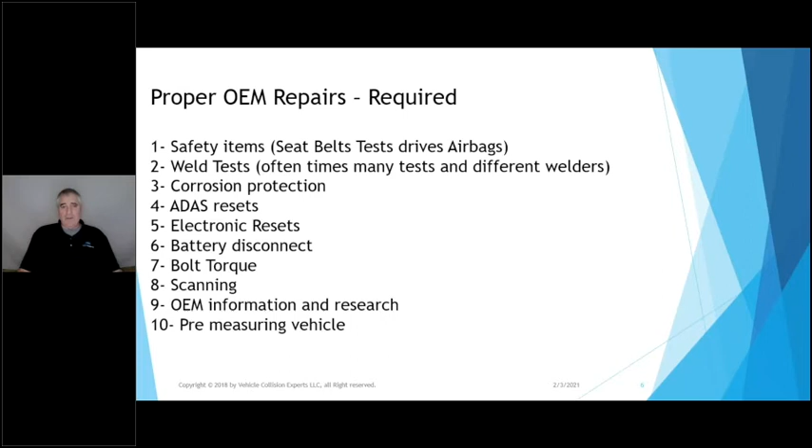So at VECO Experts, we just have a 10-step repair process. It's actually very simple. If you bring the vehicle in and you do proper scanning and diagnostics, and then you pull the procedures at the time of the estimate.

Back to my example of the aiming headlights. If you put down aim headlights at the time you write the estimate, you'd pull that information and find it has a whole bunch of other things you have to do, which you'd put on your estimate and give to the technician, who would then do that.

Now, you don't have to charge for it. That's up to you, that's a business decision. And if you want to do stuff for free, okay, but you can't not do it. I know it's a double negative, sorry about that.

Number 3, we give the procedures to the technician. You'd be amazed how many times we go into shops and find that technicians don't actually have the information that was pulled in the front office. And more importantly, the technician's got to follow them. I'll talk more about that in a minute.

Proper welds and attachment, whether it's rivet or bonding. If you actually put the car back together the way it was built - give an example, a Honda Civic - if you put a rear floor panel in the way it was built, you have not repaired the car correctly. It's different to repair than it was to actually put on.

Proper corrosion protection, proper use of the quality control sheet, proper refinish, proper use of the intake SOP, and proper vehicle protection. Now if you did all 10 of those things: scan it, pull procedures when you write the estimate, give them to the technician who follows it, do proper welds and attachment, proper corrosion protection, proper QC, proper refinish, proper intake, and vehicle protection.

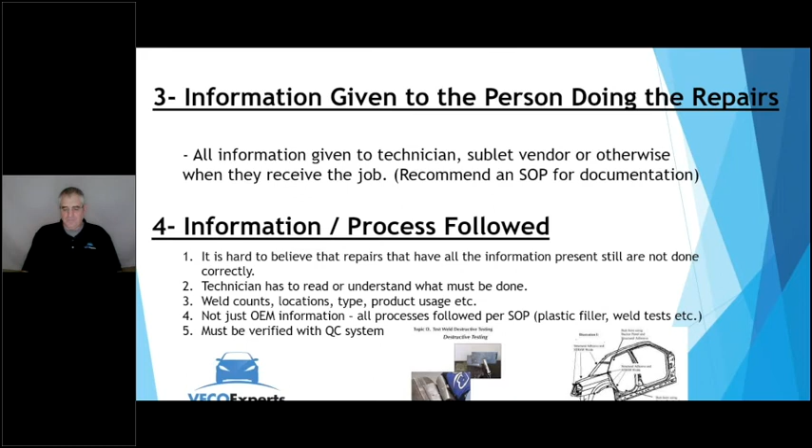So we're talking about not just where to section it, but weld counts, product usage, and then we got to verify all this. Okay, proper corrosion protection.

First of all, weld through primer or not, depending on the OEM. If you got a Chrysler that comes in, no weld through primer. If you got a General Motors, you're going to need weld through primer. Honda, no weld through primer if you're going to mag weld, but if you're going to squeeze type, you would. So it depends, and every car's a little bit different. Back to following the OEM.

If you got copper weld through primer, we call it contraband. Get it out of your shop. Get zinc weld through primer. You got it - there's no OEM that says copper weld through primer is okay to use.

Again, send me the hate mail, I'm totally happy to completely support this. I'm also one of the hosts of Collision Hub Repair University Live. We did a whole show on this, an hour and a half on copper weld through primer versus zinc primer. So I can send that to you.

No self-etching primer. If you got self-etching primer in the body department, you're fixing cars wrong. And when I say that, a lot of times people will shoot on some self-etching primer and then they'll put seam seal over the top of it.

Again, we did an hour and a half show on exactly that. Many shops are doing that. Got to put a two-part 2K product under there that's direct to metal under the seam sealer.

Now you might say, wait a minute, we do direct to metal seam sealer. I'll show you some pictures here in a minute on why you would never want to do that. So use epoxy where appropriate. If you aren't using epoxy under urethane glass, under body filler for some of the OEMs like Toyota, or under seam sealer, you're fixing cars wrong.

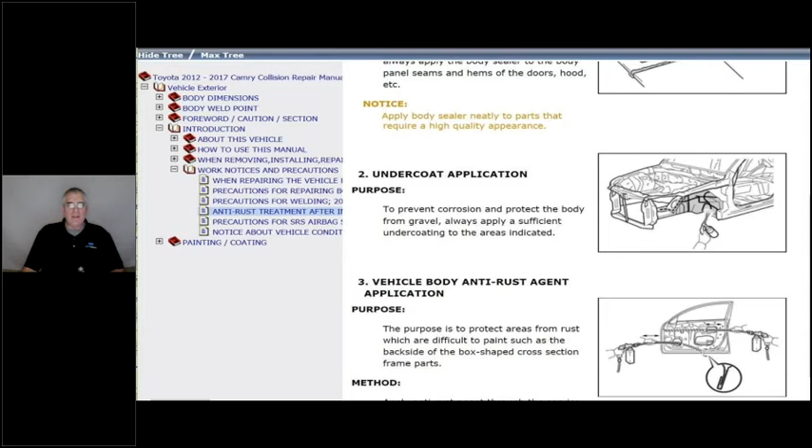Shop's in trouble. So the OEM actually does give you information on where to put cavity wax and all the different things, where to seam seal, how to do it, etc., where to put it inside doors and all that, on brand new parts.

Now, how about the copper weld through primer conversation? So a lot of manufacturers are going to give you how to actually do things. This is Toyota, it's a CRIB, a Collision Repair Information Bulletin, and basically they're saying you have to use weld through primer, and they're saying do not use copper weld through primer.

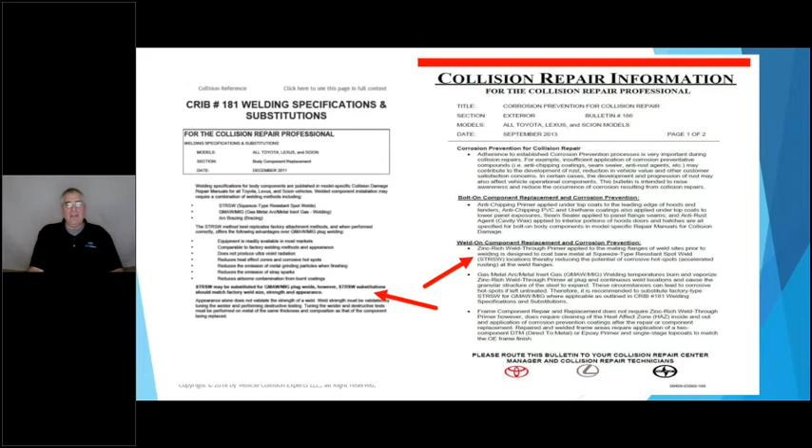Well, people didn't like to hear that, so they actually did an article on it in their Collision Pro saying don't do this. Again, at Collision Hub, we did an hour show on this, we showed you why. So now in my post-repair inspection class that I did, I don't know Melissa, it was probably what, last September?

It's February now, so 4 or 5 months ago, I talked about this. So this picture right here cost the shop about $14,000, I'll tell you why. I looked at this picture, and it looks like it's either rust, maybe somebody replaced the core support. Either it's rust or it's copper weld through primer, and there's no cavity wax. So what do I know? Number one, if it's rust, you can't stop the rust. Number two, if it's copper weld through primer, it's a Toyota Tacoma, and Toyota says don't use copper weld through primer.

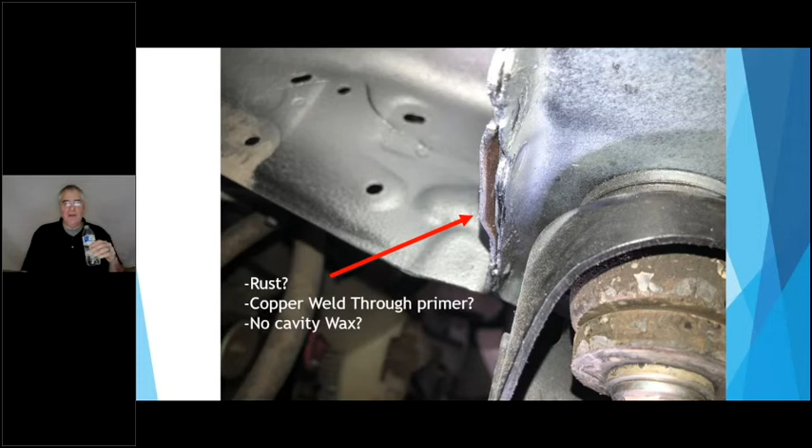And on top of that, they didn't use cavity wax, so it's rusting in between the seams. Regardless of that, this became a complete re-repair, costing about $14,000, because after it was taken apart, that's what the car looks like.

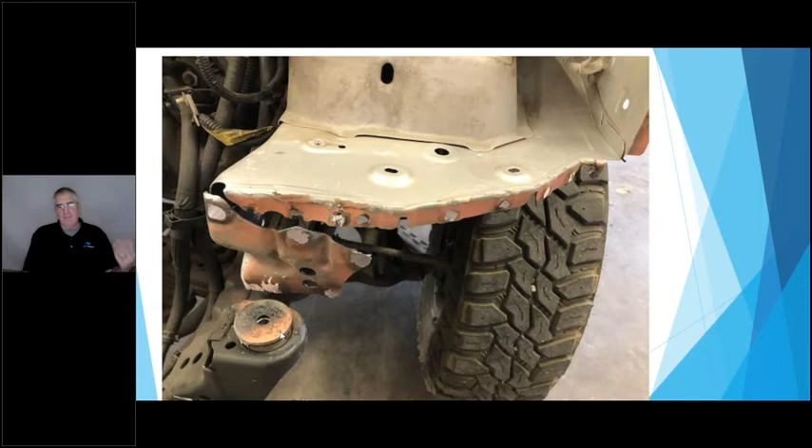Also, up along the edge, it looks pretty good, except when you start to really look at it and pull it down, it's actually rusting underneath. Now, it's not rusting bad under the seam sealer, just on the edge, but eventually it will rust. This became a complete re-repair.

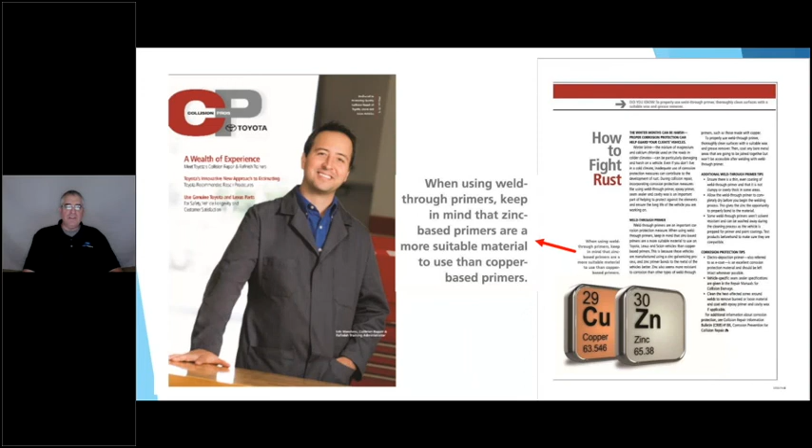Now remember I said a minute ago, you have to seam seal all welded seams, whether it was seam sealed or not, which was in this slide, right? Seam seal all welded seams, whether it's seam sealed from the factory or not.

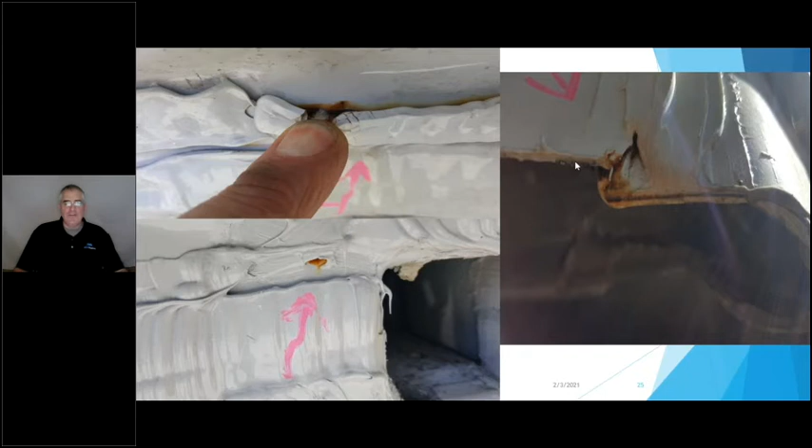I don't care if you use weld-through primer or not. Again, we did another show on that, and I-CAR had that out for years. Now, on this one here, no seam sealer. If water gets in between there, it's going to rust.

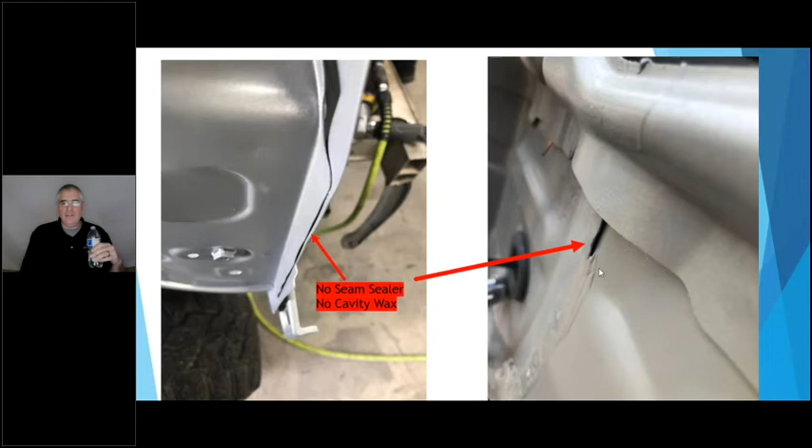It's a complete re-repair. Now this one's kind of crazy, where they actually seam sealed it almost, but then the flange wasn't completely straight, so they just didn't seam seal it.

And then this is kind of interesting. So, a lot of people say Hyundai and Kia don't have repair information. They actually do. Kia is actually much better than Hyundai, even though they're the same company. It's kind of weird. But this is from Kia.

It's a Kia Forte, and what they're saying is that they have wax injection holes in their hood. I believe there's 9 of them. So you have to put the wax in there, put 2 coats through 9 different holes under the hood, and also in the bottom of the door panel.

So when you replace the hood, what do you do? You've got to seam seal it. You've got to seam seal the hood because it wasn't seam sealed from the factory. Then you've got to paint the underside, paint the entire car. Then you've got to inject wax on the back side of the hood to do it.

Now, you might say to me, hey Mark, you know what?

You're not living in the real world. The real world is body shops, the insurance companies, blah blah blah. It doesn't matter what you get paid. All that matters is you follow the OEM and fix the car the way the OEM said to fix it. That's what the customer expects. And if you're not going to do that, tell the customer that you're not going to fix the car the way the manufacturer says to fix it.

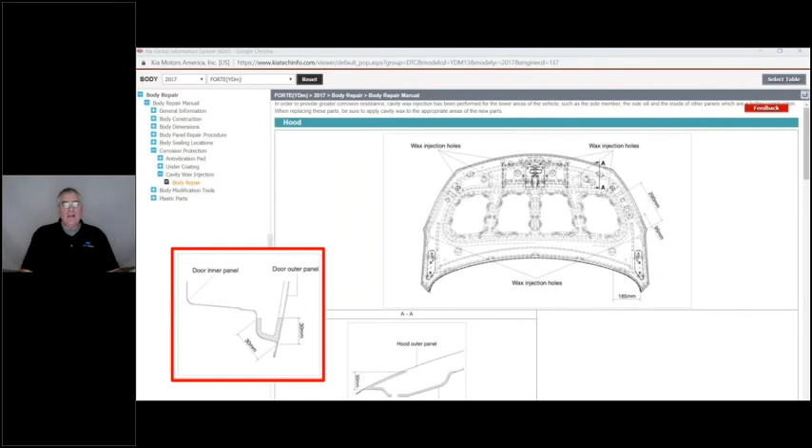I'm actually here to help you, and that's why I'm doing this presentation. Okay, quality control forms. First of all, don't make them too complicated. Keep it simple. If you have one of those quality control forms where you have 100 different things you're going to check, it's going to get pencil whipped. If you have way too many things on the form, it's going to get pencil whipped.

One of the things we recommend is to do a stage check, so when the body man's done with it, it actually gets checked by somebody other than the body man.

Think about it. You type a really nice letter to the insurance company or to your congressperson. When you type your letter, do you spell check it? Sure. Do you grammar check it? Sure. If it's a really important one, what else? Well, you take it and have somebody else read it and they find some things, or even better, go to lunch and come back and reread it. You'll find things you did wrong.

You can't quality control as soon as you finish it and say it's done. Have somebody else look. It can be a peer review. We recommend doing it by stages. There's lots of variations to the process. We talk about this in the bulletproof file a lot deeper than this, but the biggest issue is not using it the way it's designed, and the form gets pencil whipped.

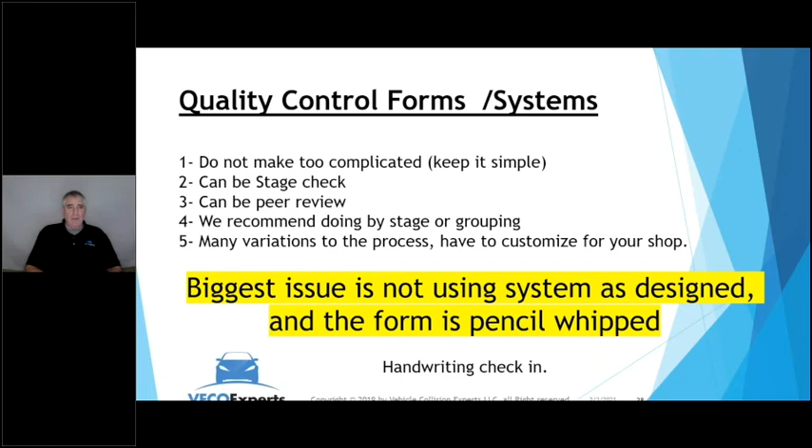Unfortunately, when the trial came up, the attorney never even called me to testify, because in the depositions with the people, they turned around and were able to prove that they pencil whipped them, because in the deposition they said, yeah, we don't have time, we pencil whipped those. So basically, it cost them millions and millions and millions of dollars. Unfortunately, people died and it put people out of business.

Okay, proper refinish, as appropriate for the repair. Color match, texture, chip coatings, underhood color, interior colors, use of substrates, the epoxy, and no acid etch or base coat, clear coat under urethane set glass. We did a show on that as well.

So this is one here where the OEM says that what you have to do is, on this Toyota, I believe it's Camry or whatever it is, the front edge of it, they want chipping primer. What does that mean? That means you put chipping primer underneath the base coat clear coat. How many shops are actually doing this? And Bulletproof File would say you'd have to have this on as a line item saying that you did this.

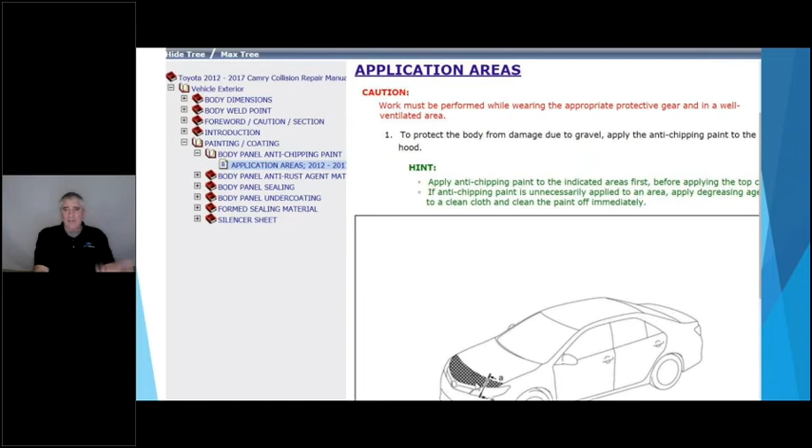And why would you do anything for free? Because it's another operation. So what you'd want to do is talk to your technicians and give them the information so they would actually do this. And you should get paid for it. Back to getting the information when you write the estimate.

Okay, so back to this. Very, very simple. So we start with vehicle scanning. That's not this program, but bottom line is start there. Get the procedures when you write the estimate so you get it all on the estimate. Even if you don't charge for it, at least you have it on the estimate so it gets done. Give the procedures to the technician, so now the technician will follow those.

And then we do proper welds and attachment, rivet bonding, whatever it is. Sorry about that, I'm going to turn my phone off because that's highly rude. So we do proper welds and proper corrosion protection, proper use of the quality control sheet.

And here's the thing: if you're going to pencil whip your quality control sheets, don't even have them. It's worse to pencil whip them than it is to get rid of them, from a legal standpoint, okay? Proper refinish, proper use of the intake SOP as the car comes in, and proper vehicle protection.

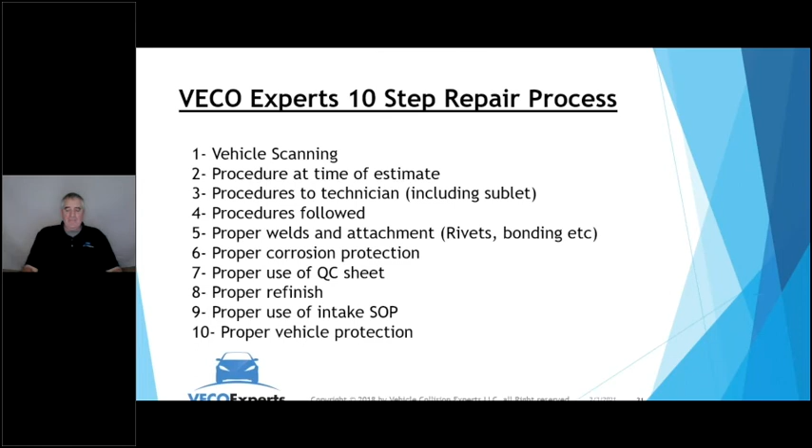So this is what it looks like, and it can become pretty obvious. So when we walk into a shop, and again, Melissa's going to give you this presentation, copy my form, I don't care. So if you took those 10 things and went out to your shop and looked at 4 cars, just pick 4 random cars. Here's the thing, if you look down those 10 things, and then you looked at it and said, okay, vehicle scanning, was it done?

It's kind of red, yellow, or green. Red is no. Yellow is it's partially done. I don't know how you partially scan, but it gives you an idea. And then green is you did it. And the next one is, did you get procedures at the time of the estimate? If you didn't get them at all, it's red. If you got some of them, but not all of them, it's yellow. And if you got all of them that you would need, that's like the headlight aiming, you get those when you said that, it would be green.

Now you notice here, proper use of the QC on this form—they're all yellow. That means they did it kinda, which means they filled out the top of it and had it on the car, but they didn't do it. Proper refinish, proper use of the intake SOP, vehicle protection.

Just draw this grid out, grab a red pen, a green pen, and a yellow highlighter, and just go yes, no, and highlight it down, and start to look at your picture. The goal is—I was working with a major MSO on this, and they go, 'Oh my God, all those have to be green.' I'm like, I know. The truth is, though, I walked into your shop and most of them were either red or yellow.

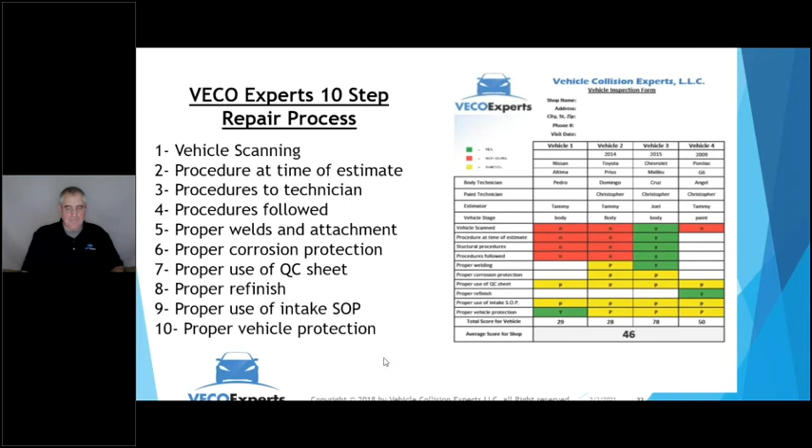Let's go. Okay, so remember that car? Now if you think about this car, this is really, really simple. We've got to follow the OEM. We've got to replace the bumper cover. If we don't, we could potentially be in a lawsuit or a problem if the blind spot detection doesn't work and somebody gets hurt or killed.

Now, there was a lawsuit that got filed, I believe it was in Utah. And the lawsuit—you can go back and check this, Repairer Driven News had it, it's not this program, but I wanted to point it out—a vehicle was repaired, it was a Tesla, and the customer was driving home. I don't know if she was reading a book or whatever she was doing on autopilot, but that's what people do that drive Teslas.

And she hit a parked car, dumpster, or whatever she hit, okay? And she said, 'I've always driven down that street and never had a problem.' So they went to sue Tesla. Tesla pulled up their information and went, 'Oh wait a minute—that VIN number, a shop in Utah'—it was Service King, not picking on Service King, it just happened to be Service King. What they did was they put a bumper cover on it, or whatever they did.

And so all of a sudden the lawsuit turns directly towards Service King and away from Tesla, because Tesla didn't do it. And all of a sudden the lawsuit went there and then it disappeared. What I mean by disappeared is it fell out of the news. I don't know exactly what happened on a legal level. All I know is that lawsuit, in my opinion—strictly my opinion—probably got settled very, very quickly and hushed up. Because if you don't do what the manufacturer says to do, even if you don't charge for it, you become liable very, very quickly.

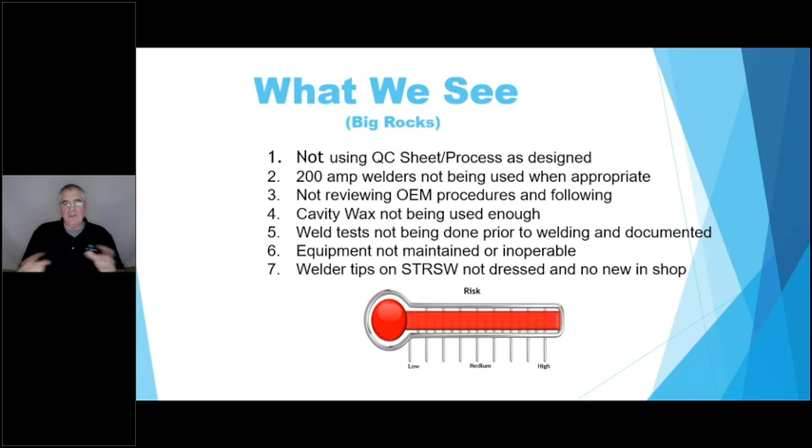You might have putting a core support on with 3 layers and 2 layers and 4 layers on a squeeze type. There's 3 right there, 3 test welds, and then you got a couple mag welds. You might have a couple more there. You might have 5 to 10 test welds per car on a core support. Every car is different. Okay, equipment not maintained or inoperable.

And here's another big one. Welder tips on the squeeze type, they're not properly dressed, or they don't have any new ones in the shop. What we say is very simple: buy a new set every time you touch a car. Now I'm not saying every time you do one weld, but if you're going to put a quarter panel, a rocker, and a B pillar on, buy a set of tips for that car. Put them on the repair order, and then give the tips back to the customer. Say, hey, you bought these, they're yours, and they go, well, I don't want them. Then just throw them in a bucket and you trade it in because it's copper.

Okay, so those are the big rocks. Those are the 7 things that, if you don't got that right, get it right. Okay, so this is what's medium risk, but still very important.

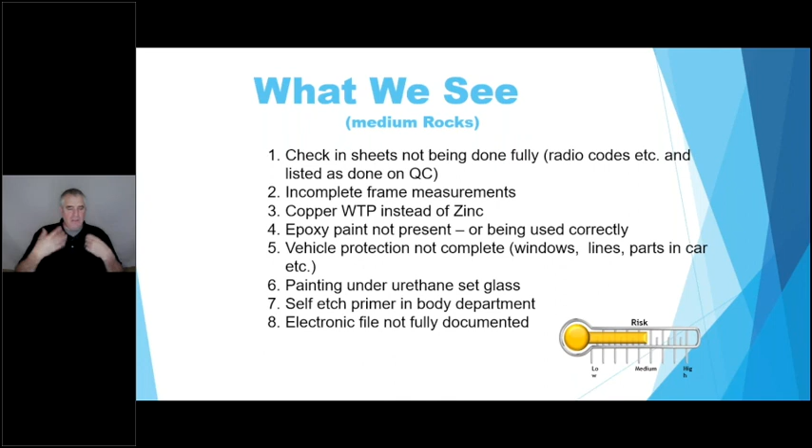Check-in sheets not being done, radio codes etc. listed, and a lot of times people say, oh, the radio codes were done. Yeah, I look at the check-in sheet and there's no radio codes. Well, how do you put the radio codes back in if you didn't record it in the beginning? Those kinds of things. You have the VIN number listed on your check-in sheet, except there's a blank there, but you just leave it blank. Well, what that tells me as an investigator is very simple: what else did you miss? You didn't include that, so I say take it off the form, get it out of there. Back to the bulletproof file, watch that one, okay?

Incomplete frame measurements. Most companies, what they'll do is they'll do a frame measurement. It says set up and measure, not a problem. Set up and measure means to set it up in datum. And on top of that, if you're going to set it up in datum, then you're going to measure the center section and the front and the back for a total of 8 in 3 different sections. Most shops do 6. Here's the problem: you put down set up and measure, and you're responsible for everything on that car, even though you didn't measure it, because you said set up and measure. Problem is now you measured the 6, and if there's damage in the back or whatever, it just won't protect you later on.

Again, copper weld-through primer instead of zinc, we talked about that a little bit a few moments ago. Epoxy primer not used correctly, where if you're painting base coat, clear coat under a windshield, just walk out in your shop, you're going to see this kind of stuff. And then if they're using any self-etching primer under windshields, you're not going to comply with at least 2, 3, or possibly even 4 federal motor vehicle safety standards: 212, 216, 208, and 214, I believe it is. So bottom line is, use the wrong primer, you can kill somebody.

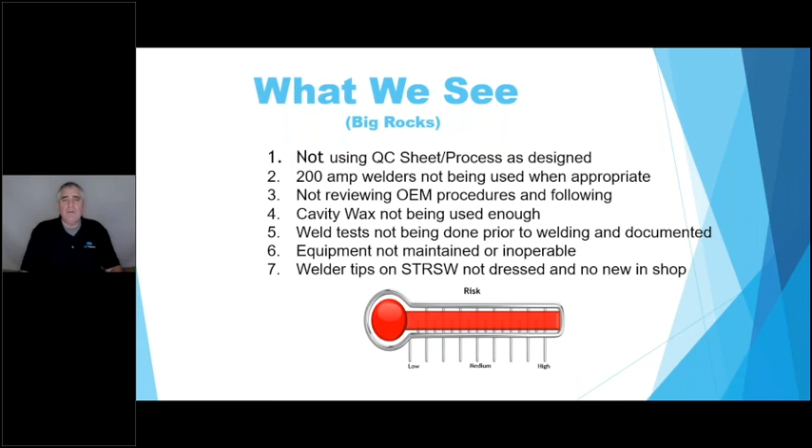Okay, painting under urethane set glass, no paint, epoxy only, self-etching primer in the body department, like that, and electronic file not fully documented, back to the bulletproof file. So it's very simple, here's the 7 things that'll put you out of business, and I invite you to go out today and look at these things. You got my cell phone, call me if you need any help with it.

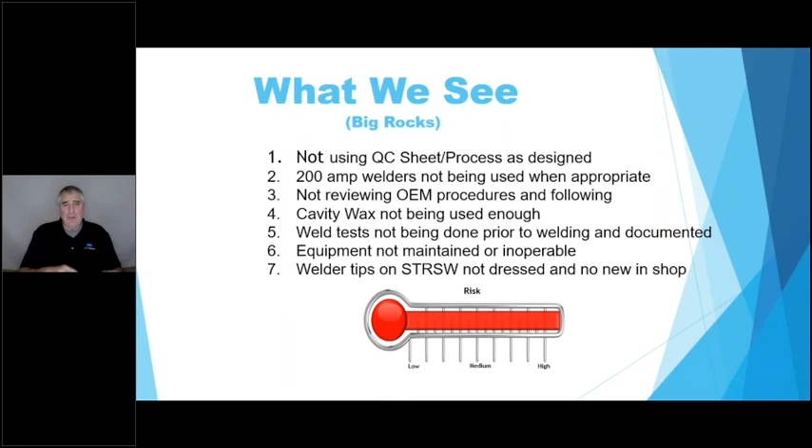I'm like, it's so funny. I tell people to call me, I'm trying to help, it's free, and they don't call. So anyways, and then...

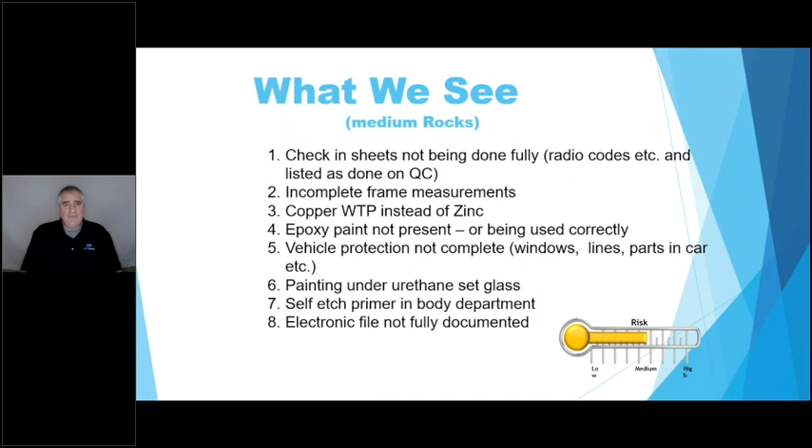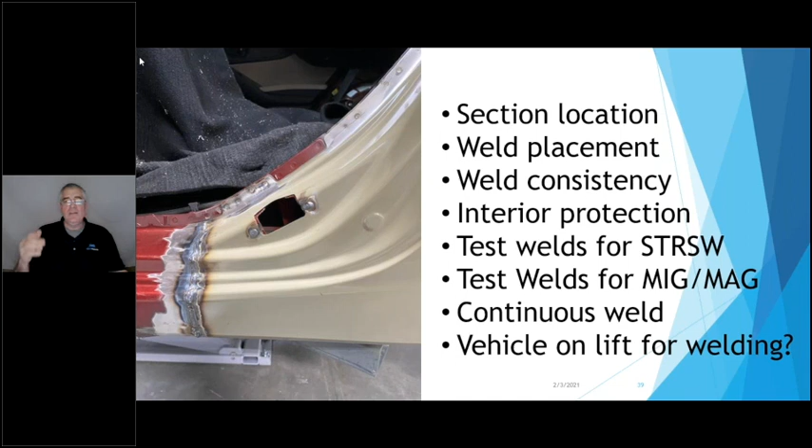That being said, that was 55 minutes of slam-it-down-your-throat information, probably more than you can digest. I invite you to go back and look at this again. Melissa's going to send out the stuff.